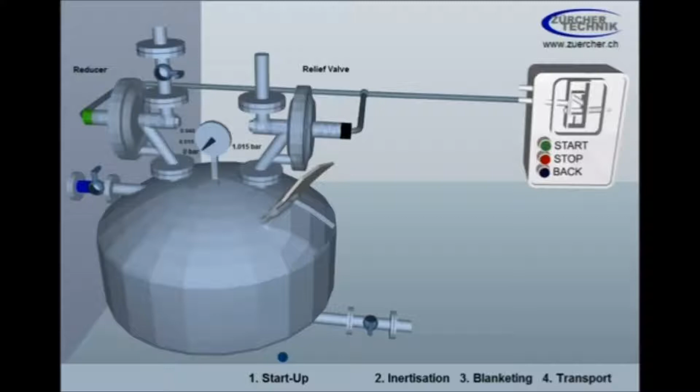The following animation explains the inerting and blanketing of a reactor with a non-active gas, for example nitrogen. Before the production process can be started, the reactor has to be inert. This means that the standard atmosphere inside the reactor must be replaced by an inert, non-active gas.

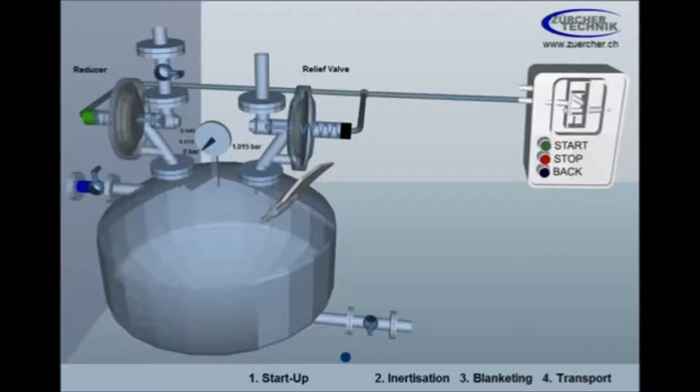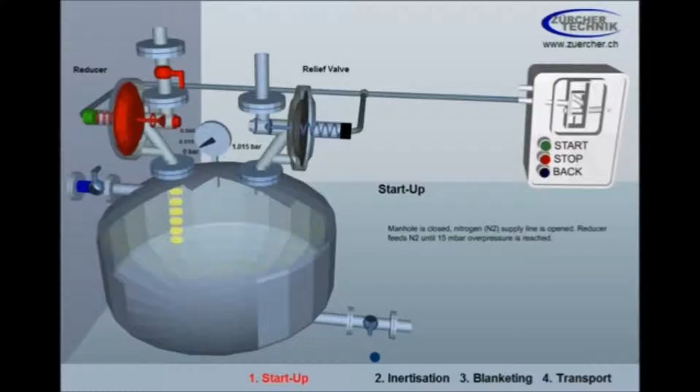Please push the Start button on the control panel to start the animation. The manhole is closed, the nitrogen supply line is opened. The reducing valve feeds nitrogen inside the reactor until the overpressure reaches 15 millibar.

Additional to the preset pressures of the regulators, a pilot pressure of 1 bar is enabled. The working pressure of the reducing valve is increased from 15 millibar to 1015 millibar. The one from the relief valve goes from 40 millibar to 1040 millibar. If the pressure inside the reactor reaches 1015 millibar, the pressure reducing valve closes.

The pilot pressure is now disabled. The working pressure of the regulators goes back to the preset value. The relief valve opens and releases the pressure inside the reactor to 40 millibar. The first inerting cycle is finished. The content of oxygen is reduced to 50%.

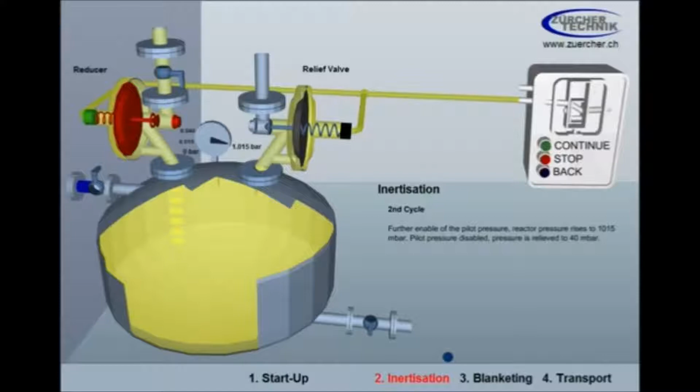For the further reducing of the content of oxygen, a second inerting cycle is started. The pilot pressure is enabled again. The pressure inside the reactor rises to 1015 millibar and is released to 40 millibar by disabling the pilot pressure. The second inerting cycle is finished. The content of the remaining oxygen inside the reactor is again reduced to the half.

This pressurization and relieving will be continued until the residual oxygen content falls below the specified value. Now the reactor is inert and ready for the production. Without pilot pressure, the regulators work in the blanketing mode.

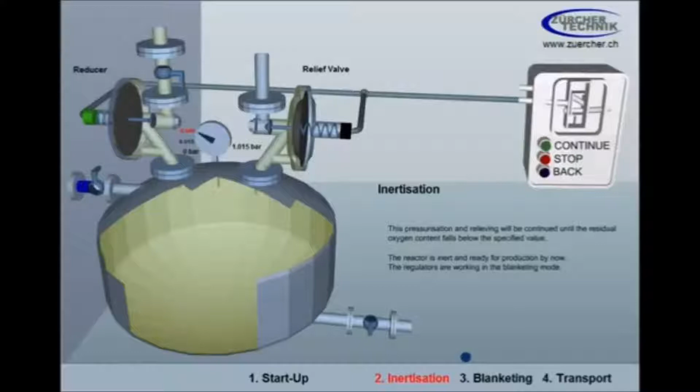The reactor is filled, and the production process begins. By the steady rise of the fluid level, the reactor pressure rises. The relief valve opens when the pressure inside the reactor exceeds 40 millibar and discharges.

After processing, the reactor is emptied. By the lowering of the fluid level, the inside pressure falls. When the reactor pressure drops below 15 millibar, the reducing valve opens and supplies nitrogen.

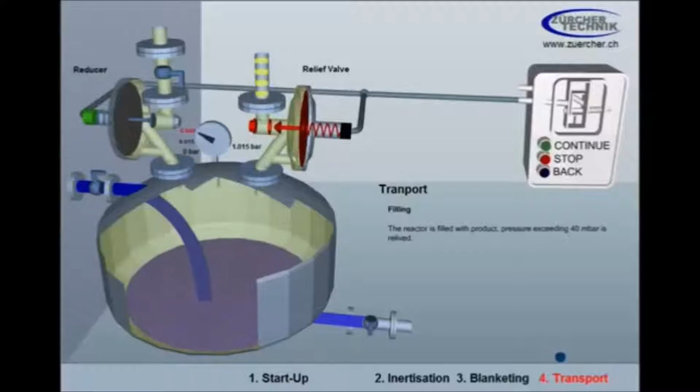Beside inerting and blanketing, the pressure regulators from Zuercher Technik can also be used for the transfer of products. To give you a demonstration, the reactor is filled again. By enabling the pilot pressure, the inside pressure rises to 1015 millibar.

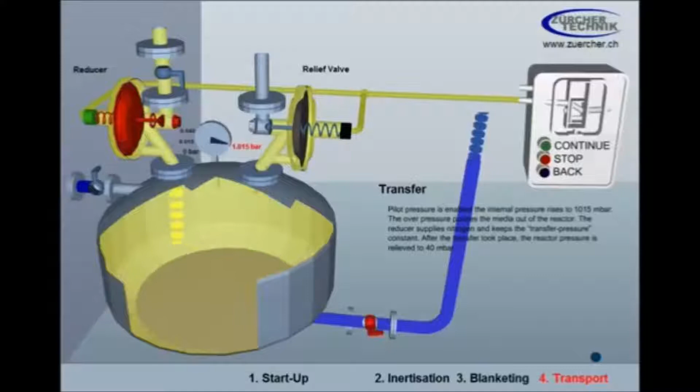The overpressure pushes the media out of the reactor. The reducing valve supplies nitrogen and keeps the transfer pressure constant. After the transfer took place, the reactor pressure is relieved to 40 millibar.